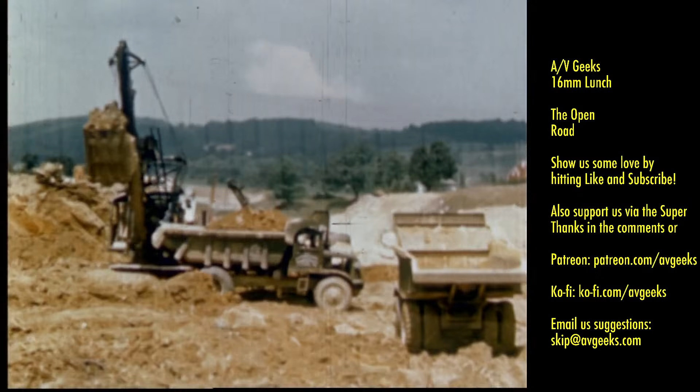Oddly enough, a great portion of the steel used remains forever embedded in the paving, where it serves to give the roadway permanent strength and durability. Some of it, however, is visible as in overpasses and bridges. In the construction of highways, steel serves also in the complicated and amazing road building equipment characteristic of the work to be done. The toughest jobs are accomplished in stride, and roads can be cut through to provide the most advantageous routes.

In the old horse and buggy days, the course of a road was frequently dictated by the location of a bridge. This was the era of the covered bridge, picturesque and substantial, but today a symbol of the past. As the automobile brought higher speeds of travel and more traffic, the type of bridge was gradually changed to meet the new conditions. Through the use of steel, rivers are now spanned without deviation from the prescribed course. Modern bridges, designed with an eye to beauty as well as strength, are a part of the highway.

Early concrete roads were simply cast slabs without inner reinforcing, but the traffic soon became too heavy for this type of roadbed. The lesson was learned that highways, like other types of construction, can only be as strong as the materials used in building them.

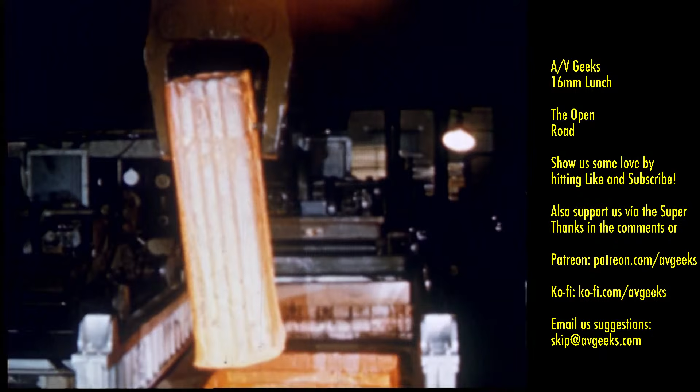Steel has the needed strength and adaptability, and the steel industry has developed through research many different products for use in highway construction. The steel for such products first appears in the solid state in the form of ingots. Here's a 6-ton ingot starting on its way to be rolled into a wide flange structural shape.

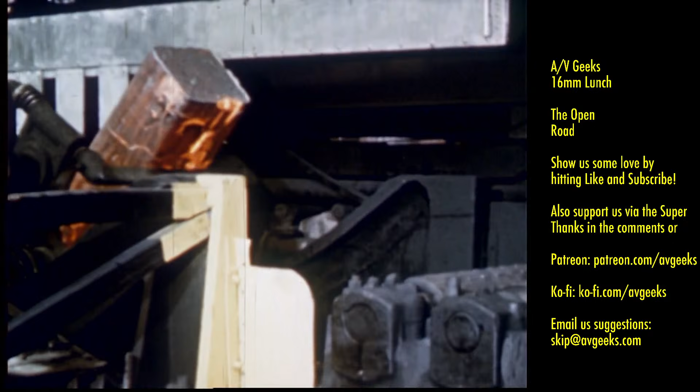Cast in conventional form from molten steel out of the open hearth furnace, the ingot is reheated in a soaking pit furnace to a temperature of about 2200 degrees Fahrenheit when it is ready for rolling in what is known as a blooming mill. At this temperature, the form of the ingot is readily changed by passing it through the rolls which exert pressure on it.

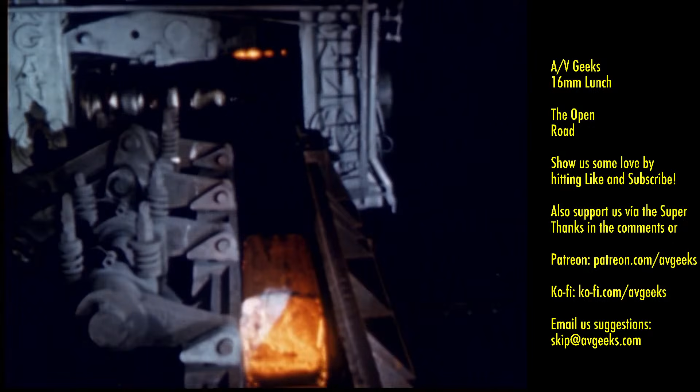Each time the ingot passes through the mill, the rolls are brought closer together. Thus, each pass reduces the cross-section and increases the length proportionately. The mill is equipped with manipulators which turn the ingot so it can be rolled on all sides, thereby improving the internal structure of the steel. The mill operators have complete control of the operation of the rolls and the movement of the ingot through the mill.

After the steel has been passed back and forth between the rolls a number of times, the rough form of the eventual cross-section begins to be apparent. The steel is at a temperature high enough to permit rolling in subsequent mills without reheating. After being rolled down in the blooming mill, and before it is passed on to the next operation, the ends are cut back to sound metal.

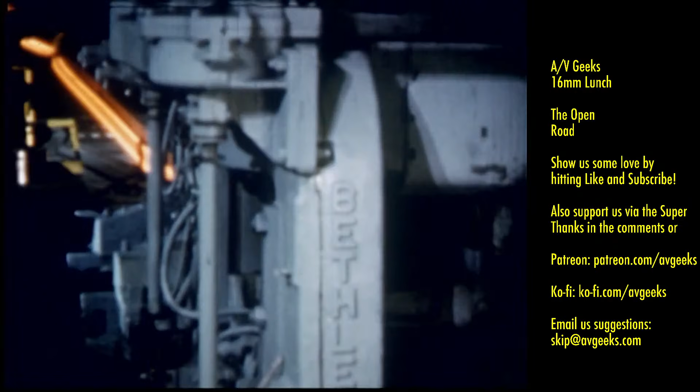The long steel shape is then sheared into lengths convenient for rolling in the structural mills. Each of these lengths is passed back and forth through the various roll stands which constitute these mills. First through the roughing rolls, then through the finishing rolls. As in the blooming mill, each pass results in a reduction in size and an increase in length.

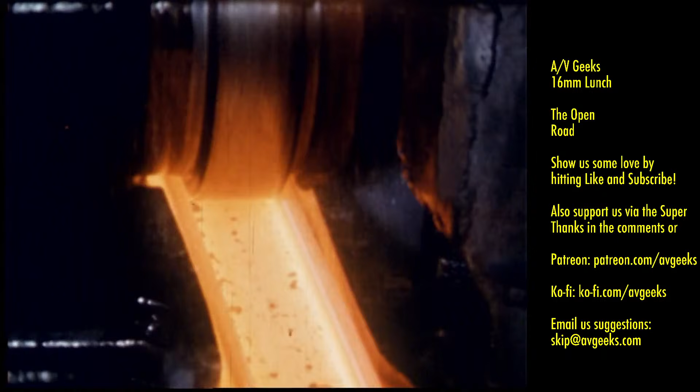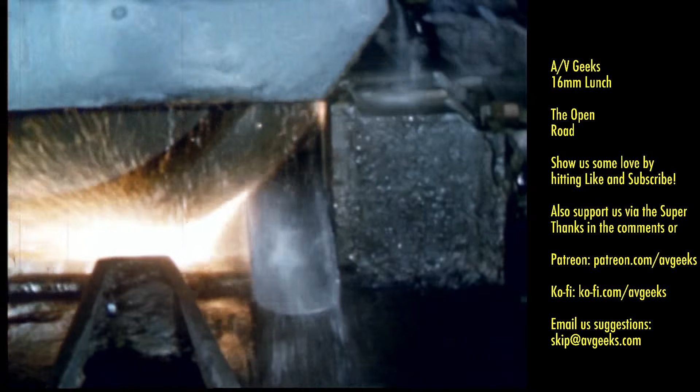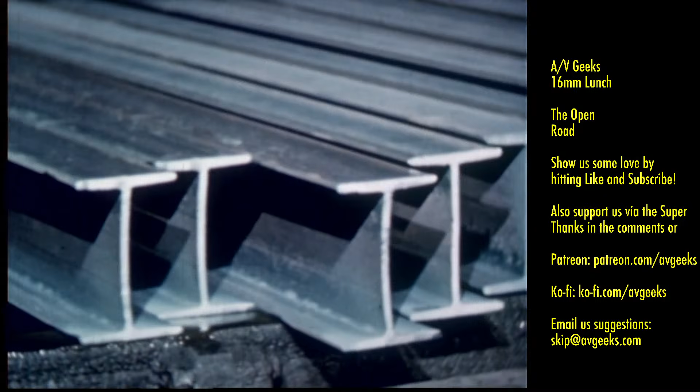The last step before cooling is to cut the 200-foot member to commercial lengths by means of a hot saw. The rolling process has been completed, from ingot to finished product, in about 10 minutes. Many types of rolling mills, differing in size, though similar in character, are used to turn out a wide range of steel products for highways. For the demands of the road builder for these products are as varied as the terrain upon which he must construct your highways.

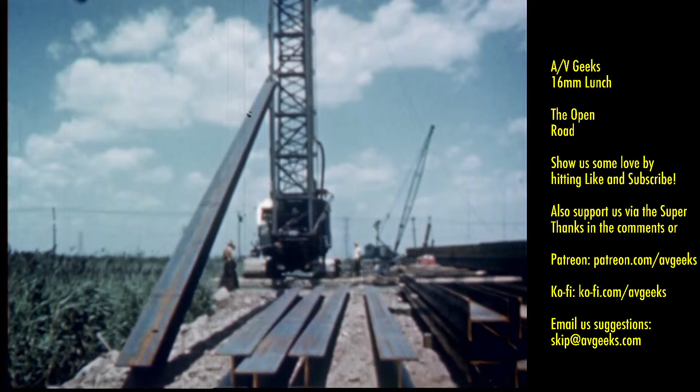Where the soil is not firm enough to support the roadway, as in marshy areas, the wide flange H-piling is very helpful. These long steel sections are driven down through the soft earth till they rest on the bedrock many feet below. Other steel members, including the reinforcing steel, can then be joined by welding or otherwise to the top ends of the piling. And the whole thing will be as solid as if the roadway were built right on the bedrock itself.

Another form of piling, steel sheet piling, is manufactured in a variety of cross-sections and plays an important part in the construction of a modern highway. This versatile material is also used for permanent retaining walls and to give extra strength to structures such as bridge abutments. When it is necessary to construct a concrete pier in the bottom of a river, a temporary cofferdam of sheet piling is called for to hold back the water. Steel sheet piling is the ideal material for this purpose.

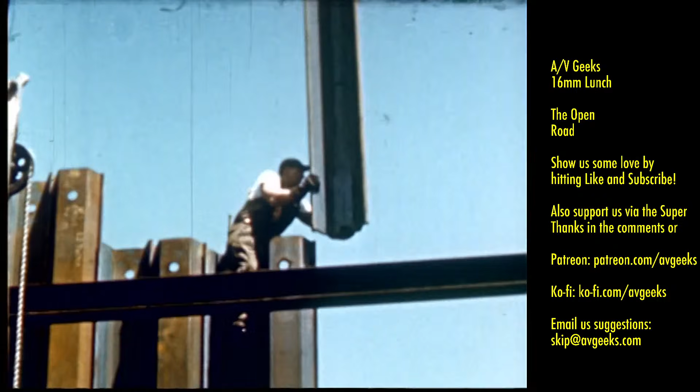One pile interlocks with the next, and the joints are accurately mated to reduce water seepage to a minimum. It can be easily driven and often can be withdrawn and used again. With the temporary cofferdam in place, construction proceeds within its protecting steel walls.

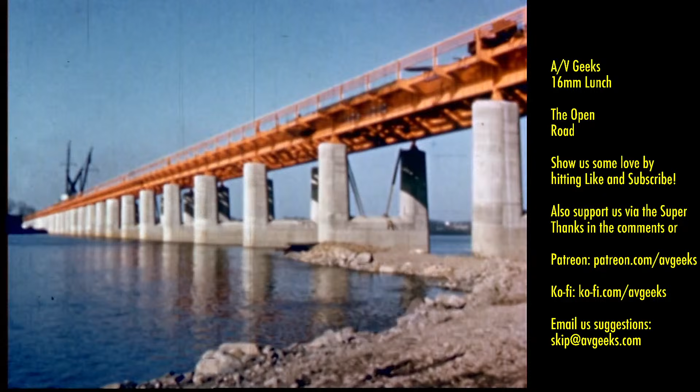Where your highway must cross the larger bodies of water, steel really comes into prominence. Here, where a main highway spans the Susquehanna River at a point where it is about a mile wide, we find an example of what the steel industry means to this great business of highway construction. Actually, construction of a highway bridge starts almost as soon as the site is selected. It has to, because there's a tremendous amount of design and engineering work to be done. The topography largely determines the type of bridge to be used.

Every piece of steel in it is cut to strict specifications at the steel company's fabricating works and assembled into sections of convenient size for transportation. These sub-assemblies are scheduled to arrive at the bridge site in the order in which they are needed. Here, as elsewhere, steel serves not only to support the roadway, but to hold together and reinforce the concrete pavement.

Everybody knows about famous steel structures like the Golden Gate Bridge, the George Washington Bridge, and the Chesapeake Bridge, but few people think of them as what they really are, highways over water. Not just connecting links between two highways, but part and parcel of the highway itself.

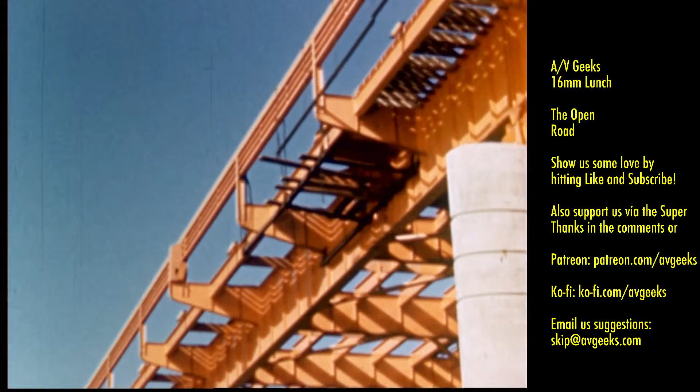From the standpoint of actual mileage, of course, most of a highway is built on the ground. And even in the first steps of construction, steel enters the road building picture. Road building today is no pick and shovel operation. For yesterday, the roads more or less followed the contour of the land. Today, the shape of the land must be made to conform to the plan for the highway. Ridges must be cut away and gullies filled in.

Steadily, over the years, the jobs have become bigger and tougher. And to meet the challenge, heavier and more specialized steel road building machines have been developed. One such machine is the drag scraper. It scoops the dirt off the high spots, carries it along, and deposits it in the hollows in one operation.

Power shovels of many standard and special types dig away the earth and expose rock formations. These obstructions were spotted previously by the surveyors and now must be removed to bring the highway to the established grade. With modern equipment, it's more economical to blast them out of the way than to go around them.

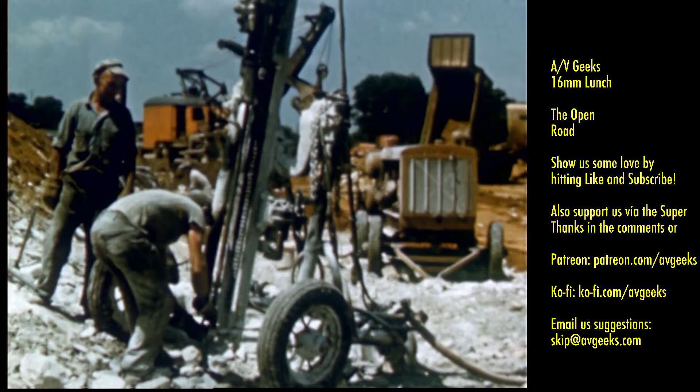Air-powered drilling machinery bores into the rock, making holes for dynamite. The drill itself is hollow, and the blast of air forced down through the center blows the rock dust out of the hole. It's a faster operation than the old way and gives a truer hole for the explosive. After the required number of holes have been drilled in the layer of the rock, the dynamite is carefully tamped into place. And when the area is cleared,

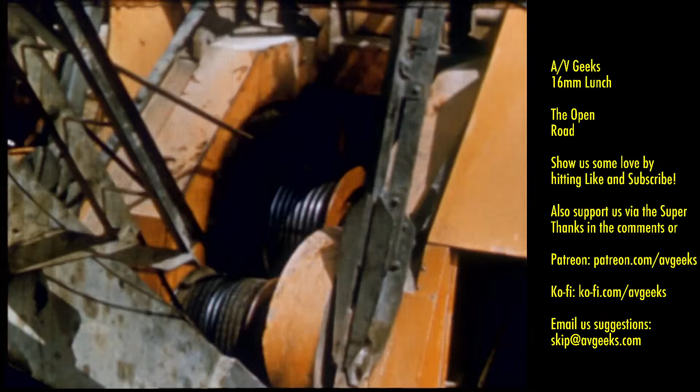after the dust settles, men and machines dig in again, scooping up the broken rock. In this type of work, equipment really takes a beating. Wire rope, a few hundred pounds of it installed on a 30-ton shovel, is the steel member on which the whole mechanism depends. Wire rope is strong and resilient, must withstand the highly abrasive atmosphere of the construction project, and must not fail when subjected to repeated flexing over small sheaves and drums. As manufactured today by Bethlehem Steel Company, wire rope gives outstanding service under hard usage.

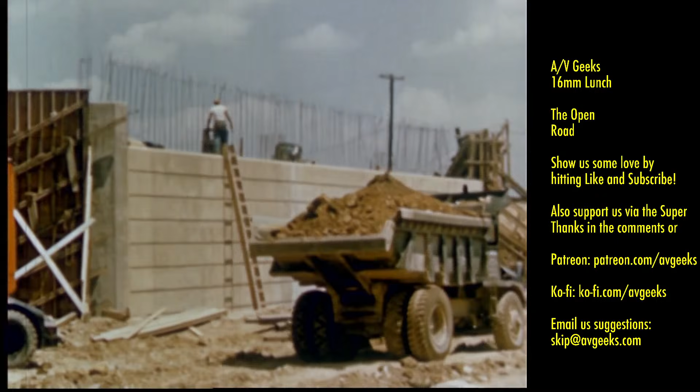Modern highway design does not tolerate grade crossings. In most cases where a railroad or another highway is encountered, either underpass or overpass is provided. In bridge construction, concrete piers are reinforced with steel bars. The protruding ends are left long enough to be bent over and tied into the bridge deck. In either piers or pavement, a firm bond between steel and concrete is assured by the deformations rolled into the bars. Bethlehem Steel Company maintains reinforcing bar fabricating shops in all major highway construction areas.

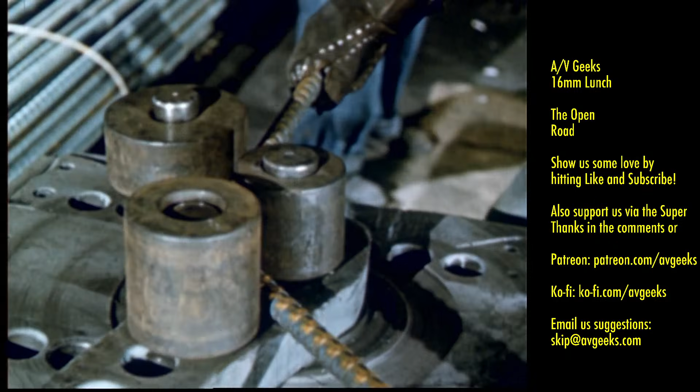Road building materials are stocked at these locations. As needed, reinforcing bars are cut to length and bent to shape. In any mass of concrete, certain lines of stress develop, and the bars are carefully bent to follow these lines so that they will bear their full share of the load on the completed structure. Used in all kinds of concrete work, reinforcing bars are one of the most important steel products in modern highway construction.

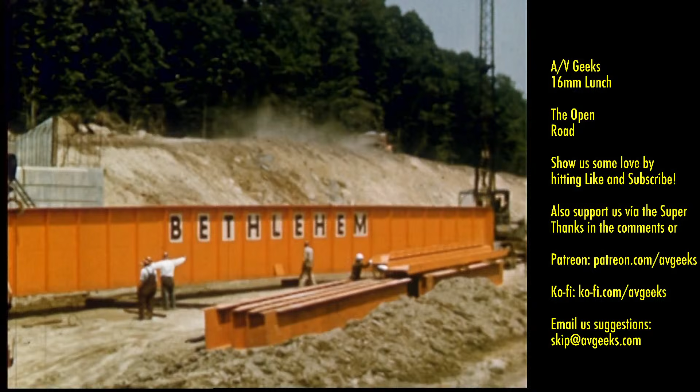This heavy structural member built up in one of the company's fabricating works is intended for use in an overpass. Getting a member of this size to the place where it's going to be used is sometimes difficult. Often the building site is many miles from the railhead, and this means trucking over unimproved highways or temporary rough-graded work roads. Specialized machinery does the job with seeming ease. Cranes also had to be moved to the site ahead of time. As with any construction, there is much planning and preparation before the final sections can be added.

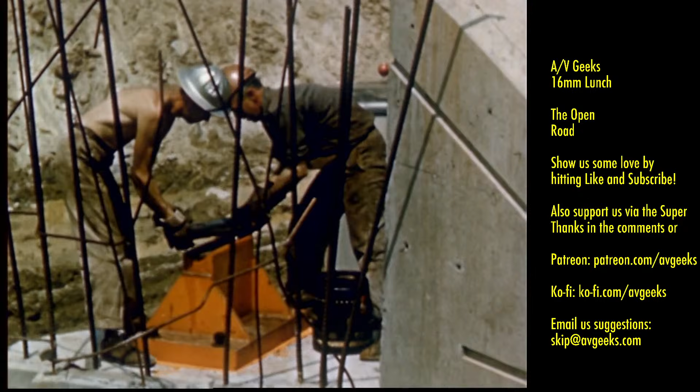When the piers are ready, the cranes are there and the lift is made. With precision and complete assurance, the girder is carefully set into place. It's 100 feet long and weighs somewhat over 30 tons, yet handling it is all in the day's work to the modern road building crew.

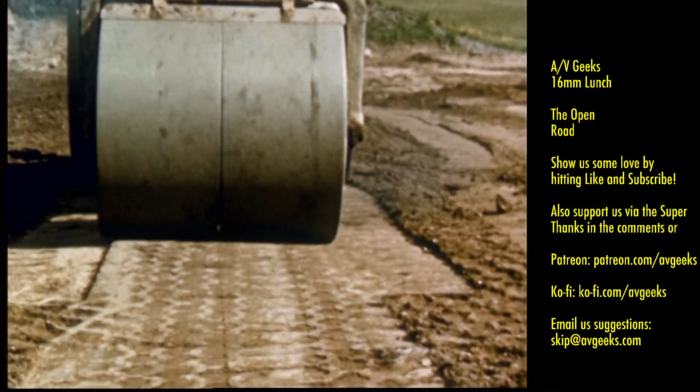Road building is a continuous operation. While work is going on elsewhere, the right-of-way is steadily being cleared of all obstacles and made ready for the paving crew. In preparation for the concrete, steel paving forms are staked in place along each side of the lane to be paved. Besides providing a retaining wall for the concrete, the forms are used as tracks on which some of the paving machinery moves.

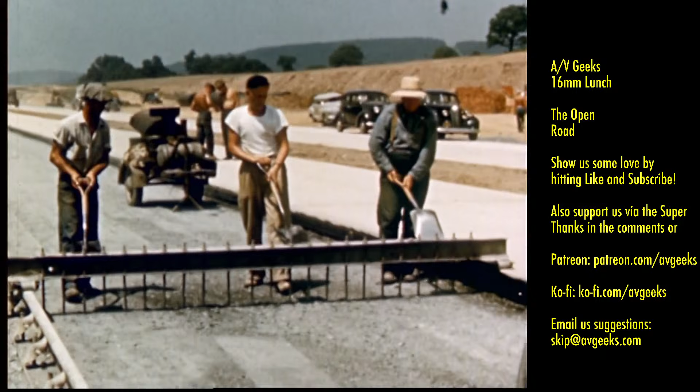These forms are laid upon the subgrade, which previously had been prepared to sustain the load specified for the paving in the roadway. A well-drained subgrade also prevents the resultant heaving action of the paving if it is subjected to freezing temperatures. An odd-looking gadget called a scratch template gauges the exact depth needed for the concrete, and the big job of preparation is finished.

Now comes the paving, and here too steel steps in. There are several important items that won't be visible when the highway is finished because they'll be embedded within the concrete pavement. Here is a simple but effective steel device that demonstrates how steel industry research has solved a road building problem.

This device, the keyway, is one of many steel specialties that not only conserve time and labor, but more important, add to the strength and durability of the pavement. The keyway and a companion piece, the center joint tie hook bolt, are quickly and easily assembled on the job.

Attached to the paving form, the keyway projects into the concrete when it is poured. When the form is removed, the keyway thus formed provides a groove or mortise into which concrete from the adjoining slab will flow, forming a tenon.

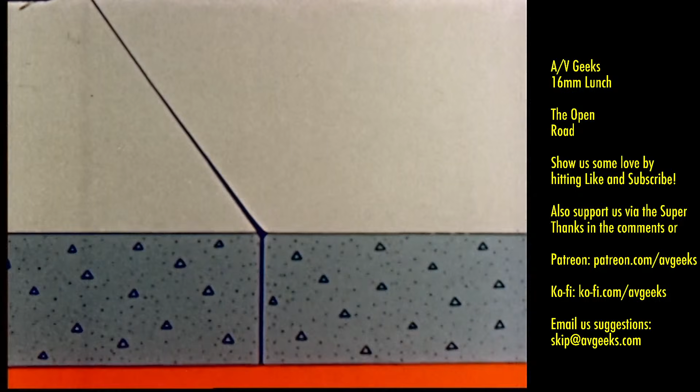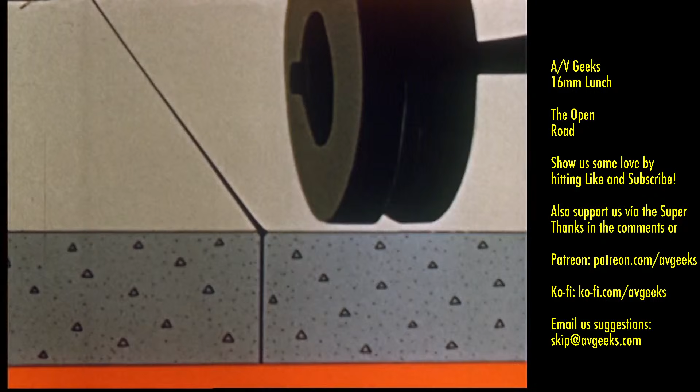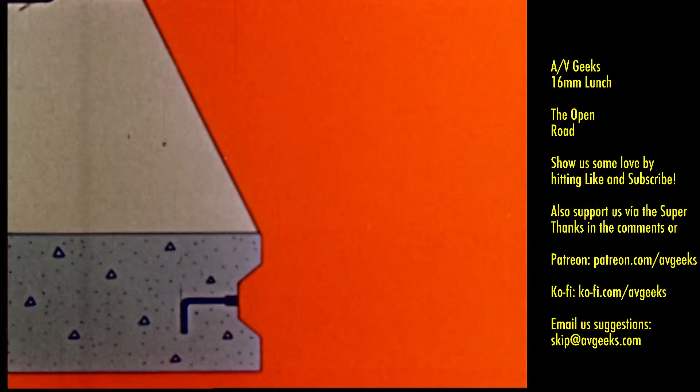Where keyway and hook bolt are not used, the weight of moving traffic tends to depress one slab where it meets the other along the center line of the paving. In time, this causes cracking. So, by using the keyway and enclosing the hook bolt in the concrete, an interlock is created, and the two slabs are tied together, sharing the load. Displacement and subsequent failure are prevented.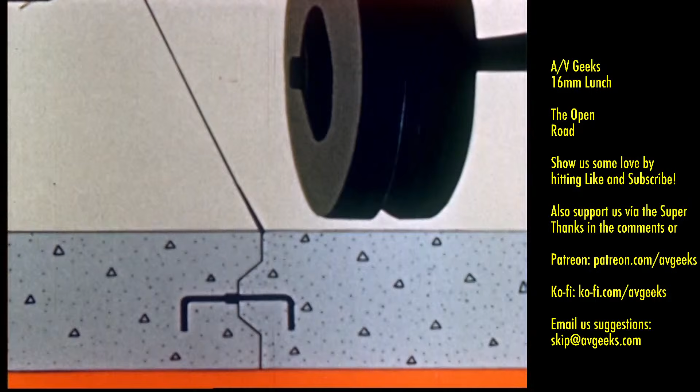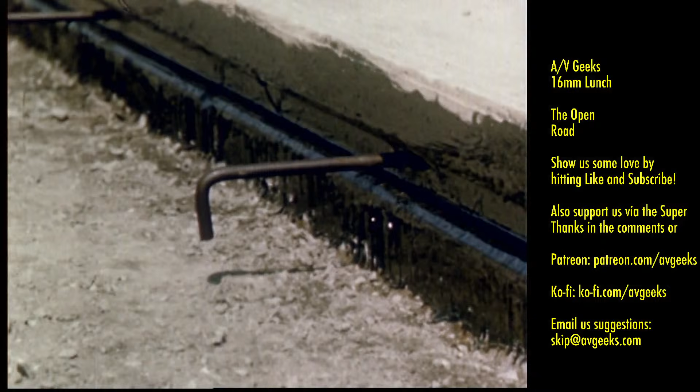After the paving form is removed, the hook bolt that will anchor the adjoining slab is simply threaded into the embedded sleeve nut. Another important aid to good road building is the Bethlehem dowel unit.

Whenever concrete is poured in a continuous operation, a means must be provided to control the cracking that may occur because of stresses induced by heavy loads and temperature changes. Otherwise, there's no telling where the cracks will appear. That is why there are joints provided between sections of the concrete. Any cracks that occur will then be where they are wanted, that is, where the dowel units are placed.

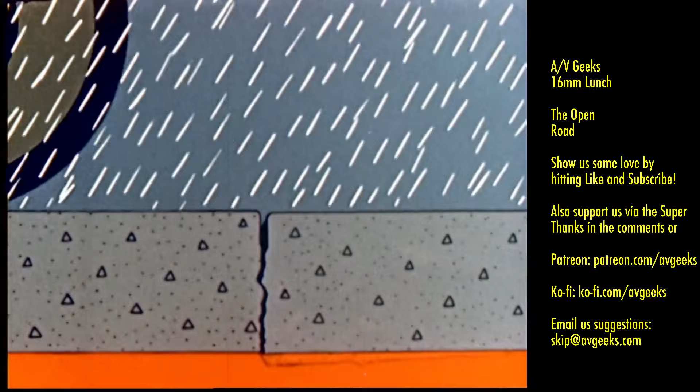When the steel dowel unit is not used, the natural cracking of the concrete is uncontrolled. Temperature changes increase the cracking, destroying the overall strength of the concrete. Because the slabs are not tied together, the pressure of heavy traffic causes them to sink down into the subgrade. And when water seeps down through the widened crack, pumping begins. The inner structure of the highway begins to deteriorate and eventually to crumble and fall apart.

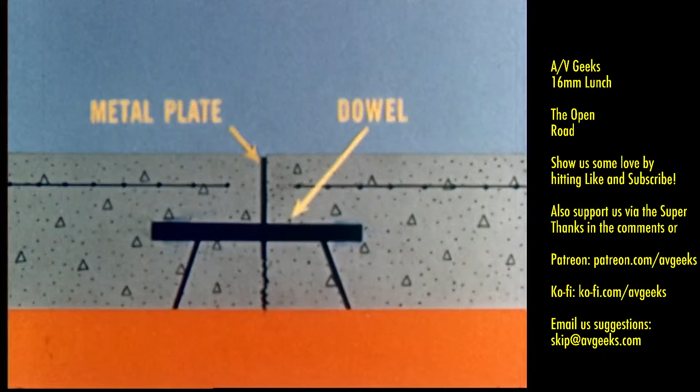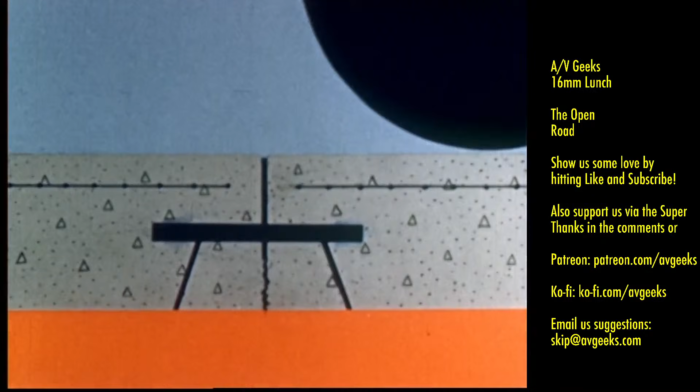When the steel dowel unit is used, the faulting is controlled and held to a minimum. Also, pumping is prevented, thereby preserving the integrity of the subgrade. The concrete stays strong and firmly in place. The dowels hold the slabs in line under temperature changes and also provide a means of transferring the weight of heavy traffic from one slab to the other.

Dowel units are economical to ship by rail or truck. They nest easily, and because they are light and compact, they can be assembled either right on the job just ahead of the pavers, or if more convenient, at the contractor's stockpile. The steel plate fits snugly, and the oblique slots keep it from floating in the wet concrete. Used in this combination, the unit becomes a contraction joint.

Another important use of the dowel unit is in an expansion joint. Concrete naturally expands and contracts with changes in temperature. Also, solid material sometimes gets down into the joints and takes up space. In time, if nothing is done about it, the slabs will buckle. By inserting a cork or fiber filler instead of the steel plate, a means is provided to absorb the pressure, and the highway remains intact.

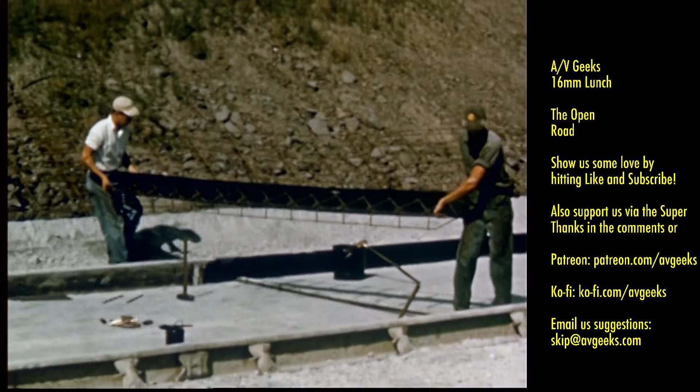With the fiber filler in place, the dowel unit is ready for its job in an expansion joint. The filler allows for the expansion of the concrete due to temperature changes, as well as its growth as it ages. It also prevents foreign material from entering the joint.

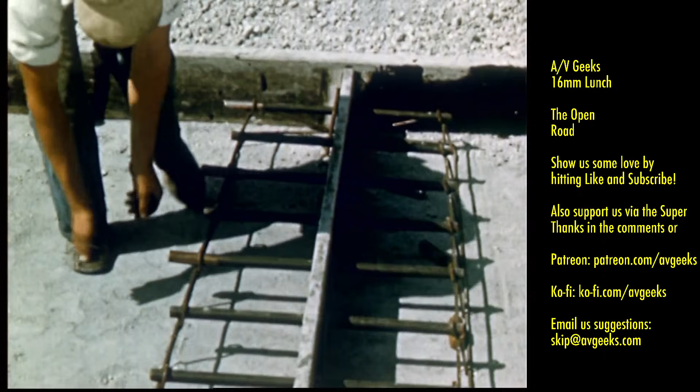When the dowel unit is placed in position, a temporary cap is installed over it. This is to protect it against the first rush of concrete in pouring. The cap will be removed before the concrete hardens. In addition, short lengths of tubing are slipped over one end of each dowel, alternating between one side of the joint and the other. Thus, working space is provided within the concrete for the longitudinal movement of the slabs.

Thermal changes affecting the concrete cause it to expand and thereby exert pressure on the filler, which forces the sealing compound slightly above the joint. When the pressure is relieved, the compound retracts to fill the void, thus maintaining its sealing property.

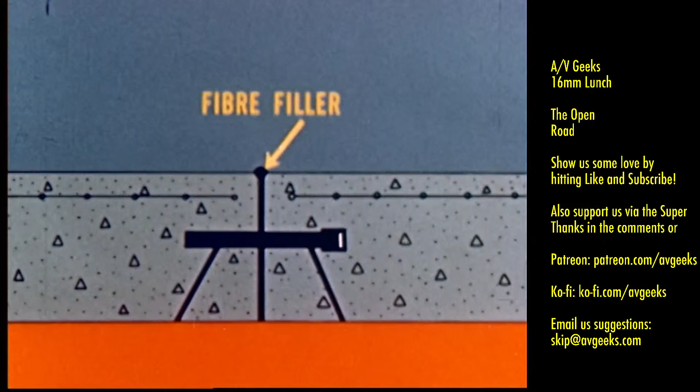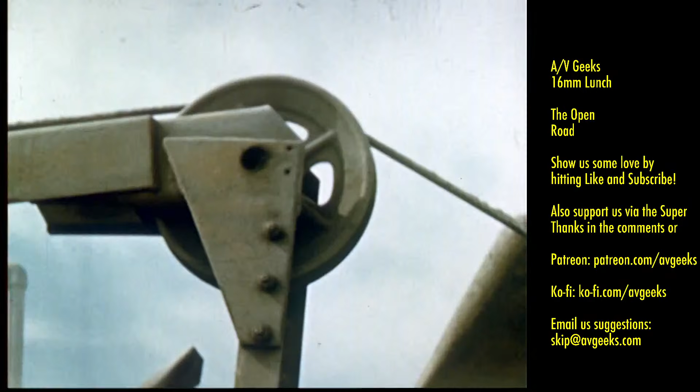Concrete paving today is a highly organized assembly line operation. The dry ingredients, sand, stone, and cement, are carefully measured elsewhere and brought to the job by a fleet of trucks. Each batch is dumped into the dual drum paver, which is really a mixer on wheels, capable of handling up to 72 batches per hour. On single lane paving, the teamwork of men and machines averages up to 3,000 feet of finished paving in an 8-hour day.

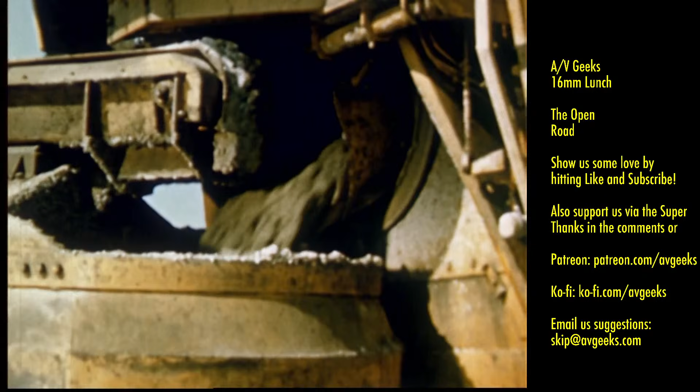The mixer has 2 drums. This design enables the paving operation to proceed without delay, because while one batch is being mixed, another is being transferred to the bucket. The moist concrete is dumped on the roadway just ahead of the spreader.

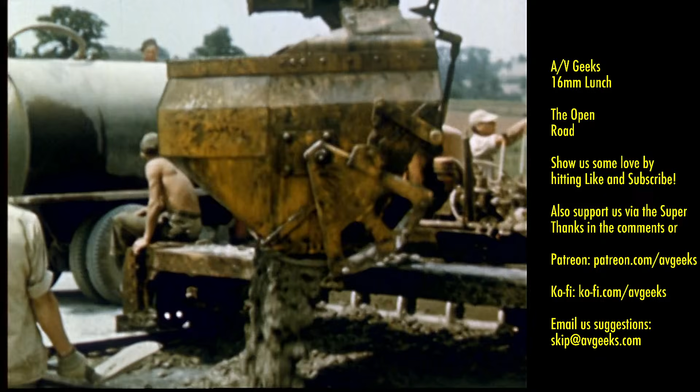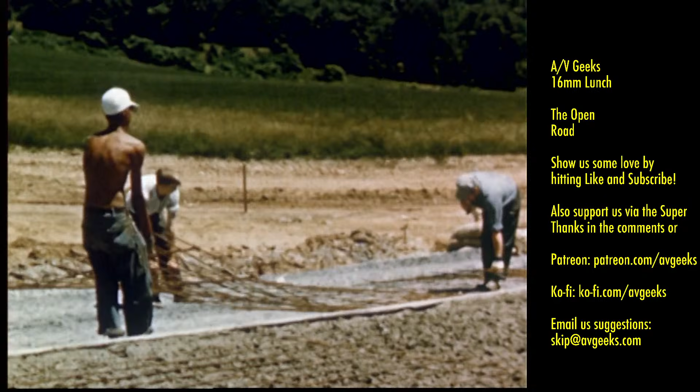This way of working is called the strike-off method of paving, which means that the first course of concrete is roughly leveled off at the proper height for laying in the reinforcing steel, which is in the form of steel mats. This hinge type is a product of Bethlehem Steel Company. These steel mats are fabricated at a number of Bethlehem's plants and mill depots. The special hinge makes it possible to handle the extra wide mats easily.

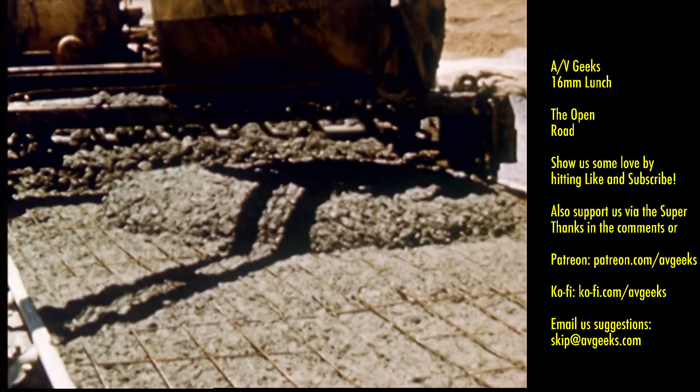The procedure for laying the second course of concrete is the same as for the first. The same machinery is used and all operations are repeated, except, of course, the spreader is raised to the new level. In double-lane paving, the slabs may be poured as wide as 24 feet.

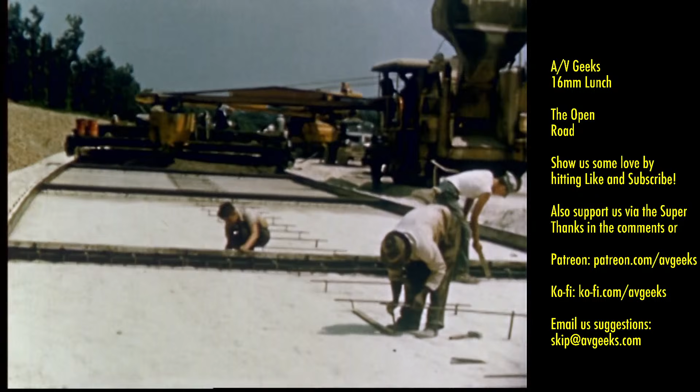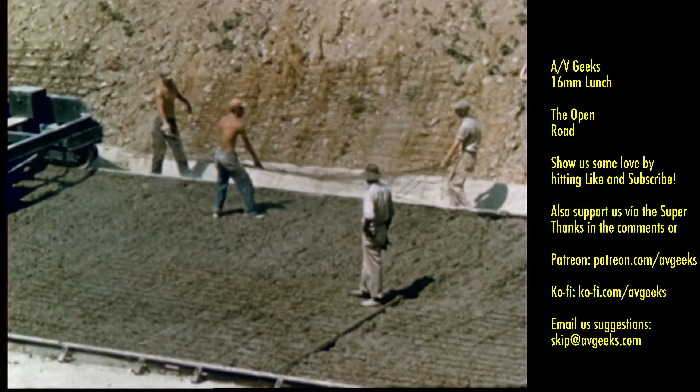Most highway steel products are designed to fit either paving method, but in double-lane paving, single bars of reinforcing steel are used in place of hook bolts. These bars provide a center tie between the 2 halves of the wide slab. In double lanes, the center joint is formed by cutting after the concrete is poured. This gives the double lane slab the appearance of 2 lanes.

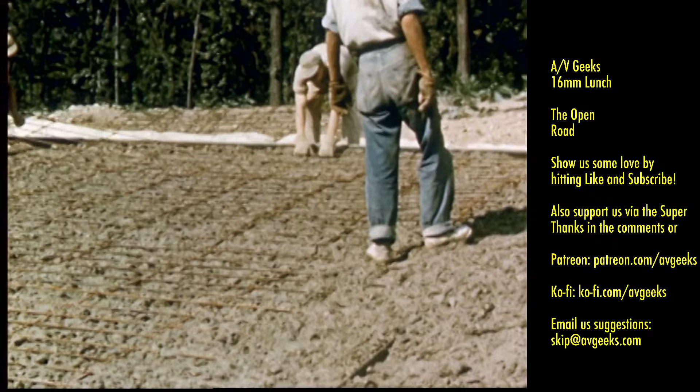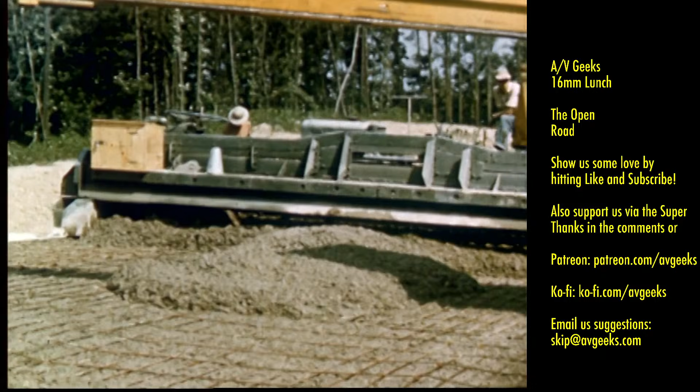Naturally, a double width lane requires twice as many steel mats as a single lane. In both types of paving, the hinged mats are simply unfolded and laid out side by side. Just a simple arrangement of steel rods crisscrossing the roadbed, but when the final course of concrete is put in place on top of them, this strong mesh of steel locks the whole thing together. This is highway steel in one of its simplest but most effective forms.

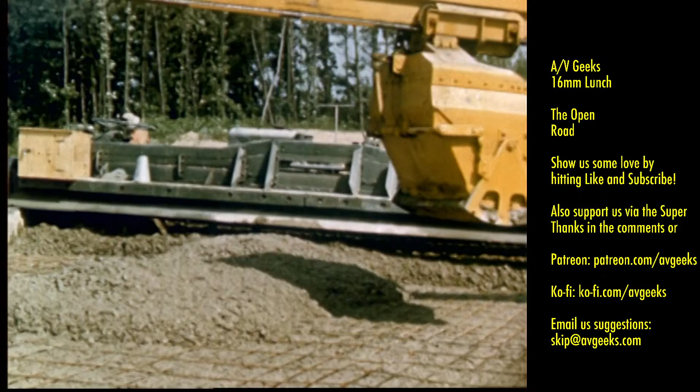The spreader now goes to work on the concrete mass. This action serves not only to distribute the concrete evenly between the forms, but also agitates it so as to maintain the proper distribution of the ingredients. Whether the road builders are using the double lane method or paving 1 lane at a time, the basic procedure from here on is the same. Following along behind the spreader is a battery of finishing machines.

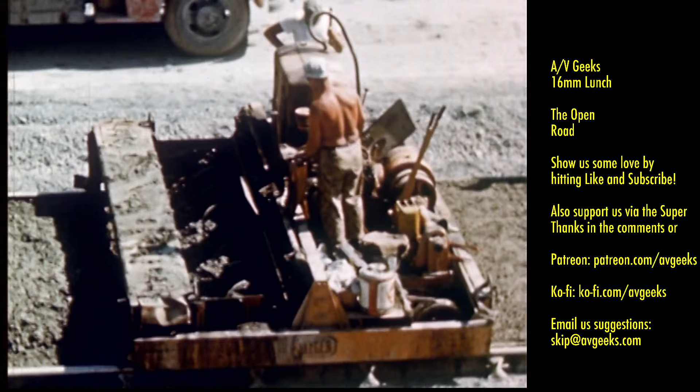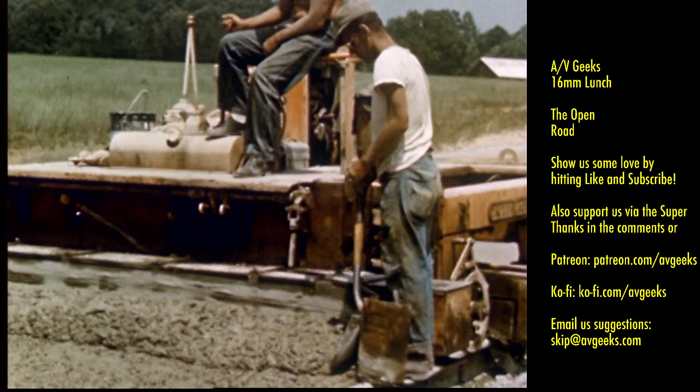Each machine has 2 oscillating members called screeds, which scrape off the concrete at the level of the paving forms. This operation is repeated by a second machine, which closely follows the first. The action of the screeds not only establishes the final grade level of the finished highway, but also consolidates and improves the structure of the concrete near the surface.

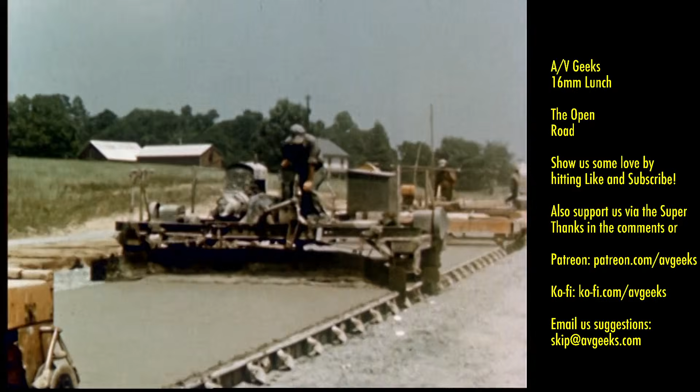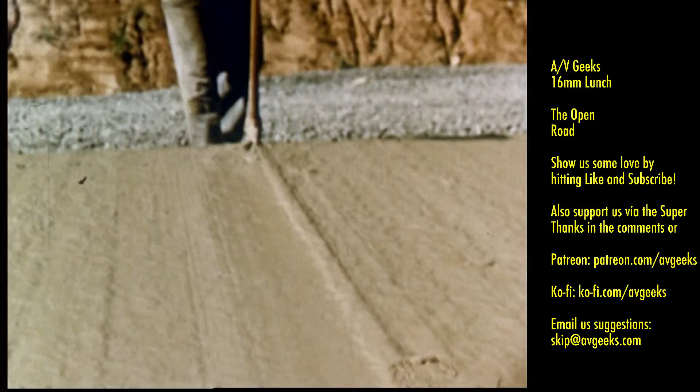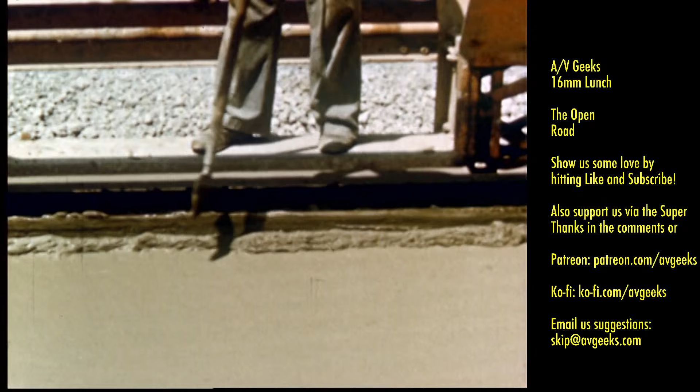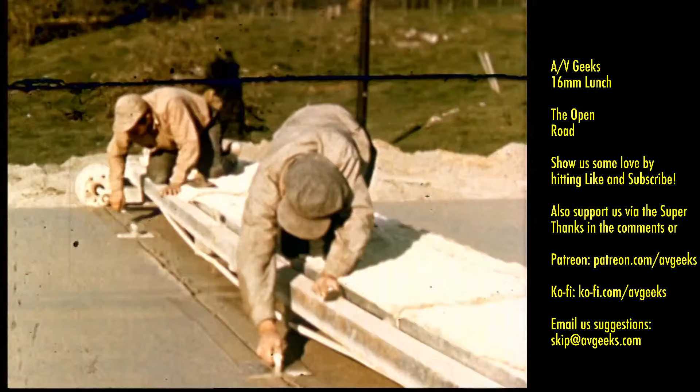Then the rough highway is ready for the rear guard of hand craftsmen who follow the road building machinery, craftsmen who put a final finish on the road surface. Any slight wrinkles left in the wet concrete are smoothed out by the hand float finisher. Other men follow with strips of burlap on a wooden frame, giving the surface the proper texture for traffic. Craftsmen finish the edges along the paving form and smooth out the concrete along the joints.

There are several ways of curing concrete. In this instance, burlap is placed over the fresh paving and kept moistened until the concrete is set or cured. This prevents the concrete from drying out too fast. When the pavement is completely dry, the joints are sealed, which helps to prevent moisture from getting down into the subgrade and is the final step of the paving process.

This section of finished highway with its backbone of steel will be utilized by numberless trucks and passenger cars during its lifetime. It is therefore not surprising that the same type of construction is being used in airport runways, which today need to be more durable than ever before. Planes are bigger than they used to be. They fly faster, and they carry heavier loads.

Concrete has been found to best withstand the effects of impact and the terrific heat generated by fuels, such as are used in jet planes. And so the steel and steel products that make today's highways possible also serve today's airways by strengthening the airport runway.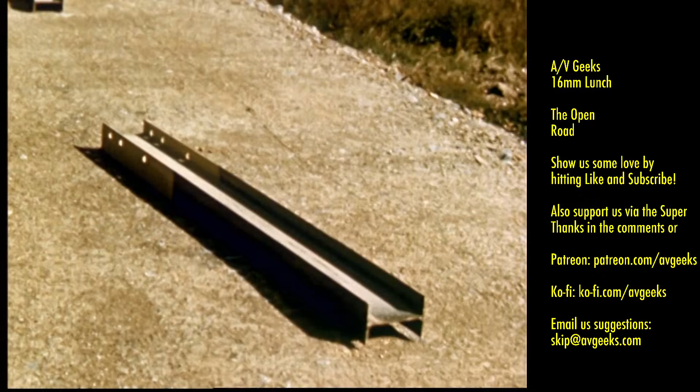No highway is really completed until it's equipped for safety. Wherever there's a curve, fill, or other danger spot along the road, there's a need for protection. Safety beam guardrail is a strong and effective highway guard. The steel posts to which the beam is attached arrive on the job cut to length and properly punched. The special post-driving equipment mounted on a truck drives them to uniform depths.

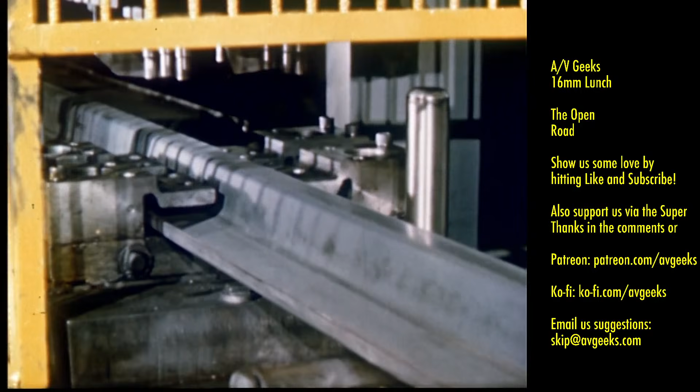Steel guard posts are easy to align, and they last longer than other types. The beam sections have a shop coat of paint and are ready for assembly when they arrive in the field. Safety beam guardrail is cold formed from strip steel and then punched and sheared to specified length simultaneously.

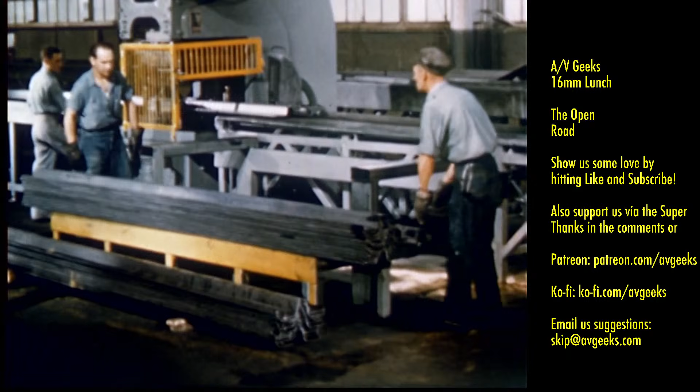The channel construction gives it unusual strength. After they're formed and punched, the guardrails are finished by being cleaned and given their protective coat of paint. One bolt fastens the rail to any type of post, and a splice assembly made up of a splice plate and bolts secures the beam ends to make one strong continuous steel rail. The flared ends of the rail add to the appearance of the job.

Safety beam guardrail gives ample protection because the continuous steel beam tends to absorb impact and distribute it over a wide area. A finish coat of white paint completes the installation, making the safety beam visible night and day. The safety beam guardrail adds to the streamlined appearance of the highway.

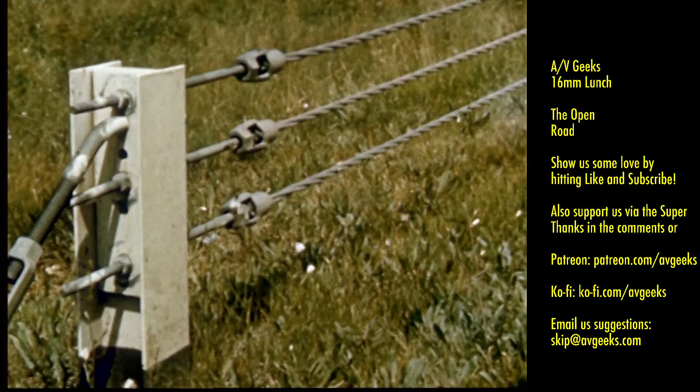Another highway safety guard, adaptable for use with wood, concrete, or steel posts, is the cable guardrail. The shape and depth of the offset bracket gives this guardrail exceptional shock-absorbing qualities. The anchor rod is attached to a concrete block buried in the ground. Turnbuckles maintain tension in the cables. This is still another packaged unit of the steel plant.

The addition of right-of-way fencing gives further protection to the motorist and to the property owner. Its hinged joint construction contributes to its flexibility, as well as its installation. Here is a protective web of steel hung on its supporting self-fastener post, a finishing touch of steel for the modern highway.

And so your highway is completed and steel has entered into every phase of its building. Steel equipment was used in clearing the roadbed and in pouring and smoothing the concrete. Steel buried in the paving and piers reinforces and strengthens them. Steel makes possible the necessary bridges and overpasses. Steel guardrails and fencing are protection to the traveler.

In all parts of the country, highways that are so important and necessary to our civilization are being built today with steel. Highways that will serve for many years to come. They must be strong and smooth and able to carry the great caravan of cars and trucks and trailers that make up present-day traffic safely to their destination. The modern highway is truly the open road, the broad, pleasant avenue leading to business and recreation, and future progress in highway planning and construction.